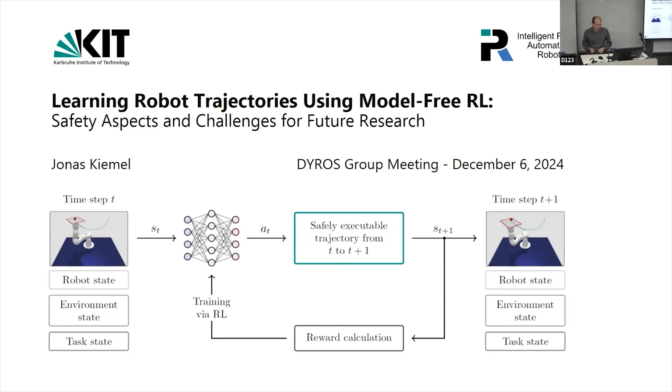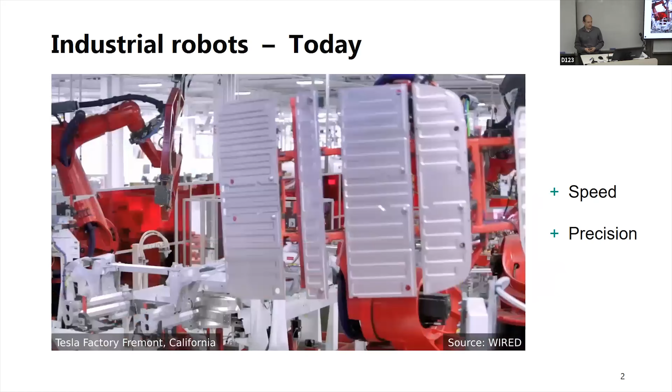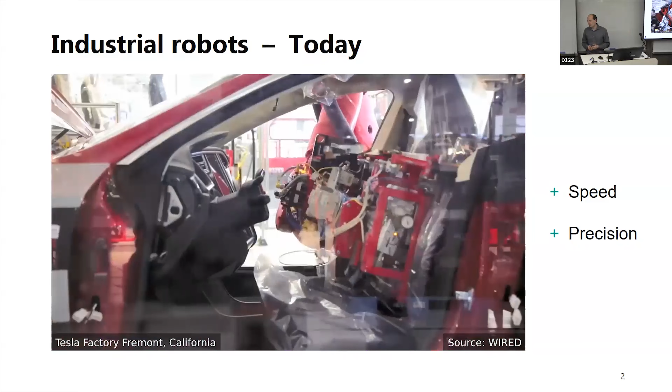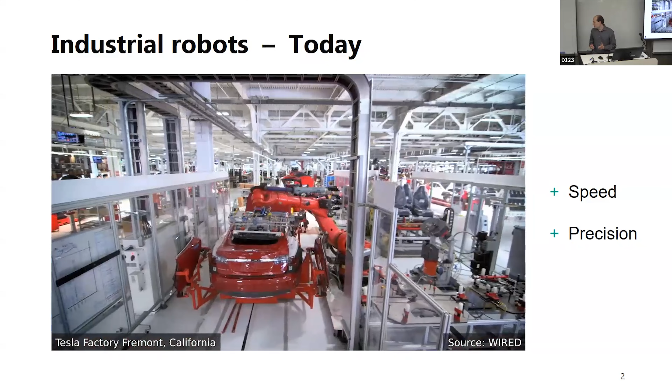So since you're all experts in robotics, I'm going to keep the introduction short. As you know, industrial robots are very fast and very precise, and that makes them perfect for industrial production plants like the one you can see here from Tesla in California. But all this only works in case the environment is completely known in advance and all the movements can be hard-coded in advance. In case the environment would change, this would no longer work.

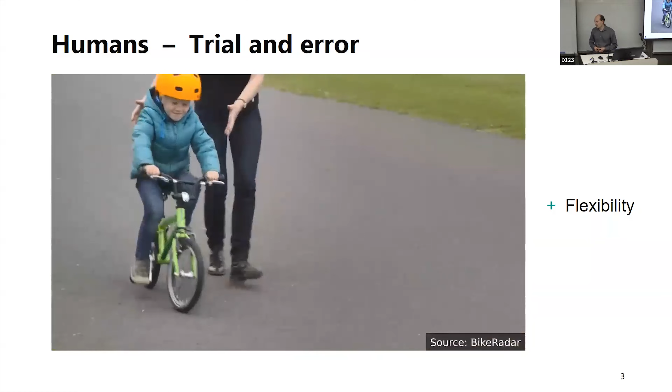And if we compare this to humans, we have a completely different approach towards learning robot movements. Humans are much more flexible. They can adapt to different tasks and different environments. And this is also because we can learn movements by trial and error.

So in reinforcement learning, we have a state space S, we have an action space A, and we have a reward function that assigns a reward to every action taken in a certain state. And our objective is to find a policy that optimizes the sum of expected rewards in the future.

So in my PhD, I worked on the topic of generating robot trajectories in real time, considering safety constraints. In my case, each state contained information about the robot, the environment, and the desired task. Then the state was given into a neural network. The neural network outputs an action, and this action is used to compute a trajectory from the current time step t to the next time step t+1. And after the execution of this time step, a reward is calculated, and this is used to train the neural network.

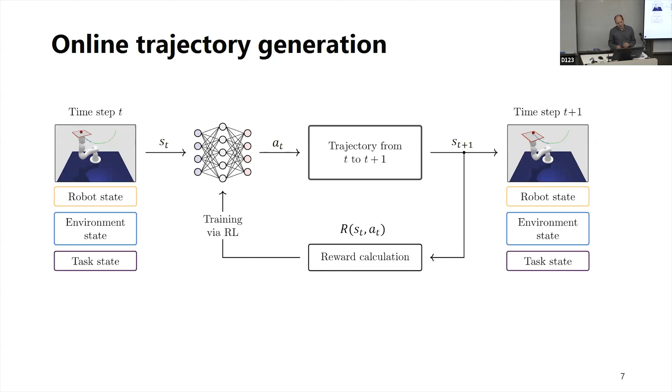How long is the time step typically? In my case, between 50 milliseconds and 100 milliseconds. So I usually use a frequency of 20 Hertz or 10 Hertz. Depends a bit on the task.

So it's a trajectory, that means you have many points in between t and t+1? It is like I compute the trajectory, yes, for 100 milliseconds, but I interpolate the points in between that are given to a joint trajectory controller. And this frequency is, of course, higher. This is usually 200 Hertz for these industrial robots I work with. These are from KUKA.

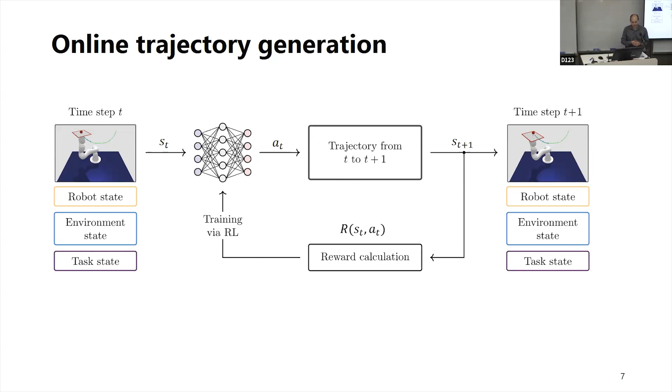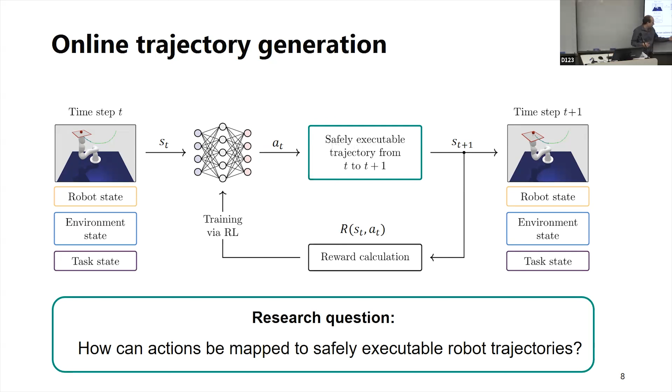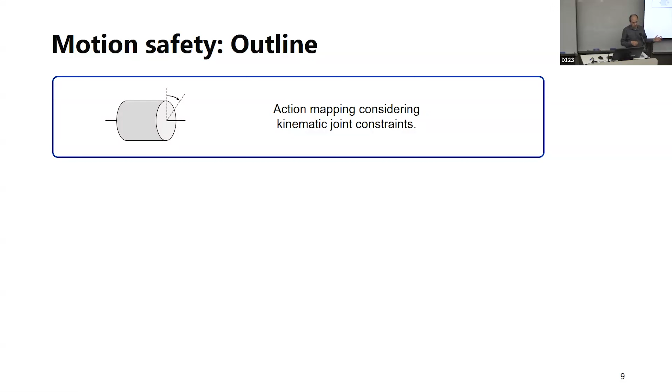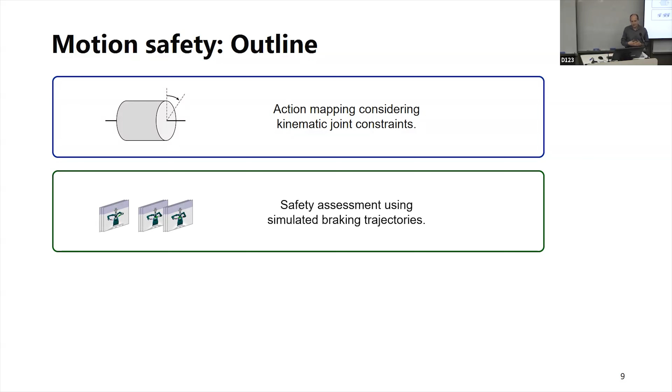And the actual research question was, how can we make sure that these actions are mapped to trajectories that are safely executable? In this talk, I'm going to talk about 3 techniques used in my PhD. The first one is an action mapping, which ensures that kinematic joint constraints are satisfied when generating trajectories. The second technique uses background simulations of braking trajectories to additionally ensure that collisions with static obstacles and self-collisions can be avoided. And in the third part, I will talk about a way to extend this technique so that moving obstacles can also be considered. This is done based on a data-based risk estimation and learned backup behaviors.

So for the sake of time, I'm only shortly talking about the state of the art, but in general, there are 3 directions to approach safety in reinforcement learning. The first one is a practical perspective, and this includes strategies to reduce the occurrence of safety violations or to reduce their impact, mostly based on engineering, like the design of the environment. For instance, if we have a bipedal robot, we could attach it to a support frame so that the robot cannot fall even if it loses balance.

And there's also the more theoretical perspective on the problem. What we can do is we can adjust the optimization objective. So this function that tries to optimize the sum of future rewards, we can, for instance, include an additional risk metric to this function to avoid safety violations during the course of training.

The problem with these approaches is typically that they are not very effective at the beginning of the training process, because the optimizer needs to collect data in the environment first before it can optimize this objective function. And the third approach, and this is also the approach I used in my PhD, is to adjust actions that are considered risky and to replace them with actions that are considered safe.

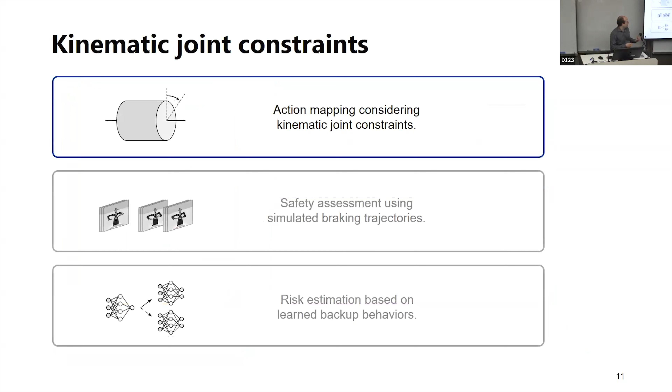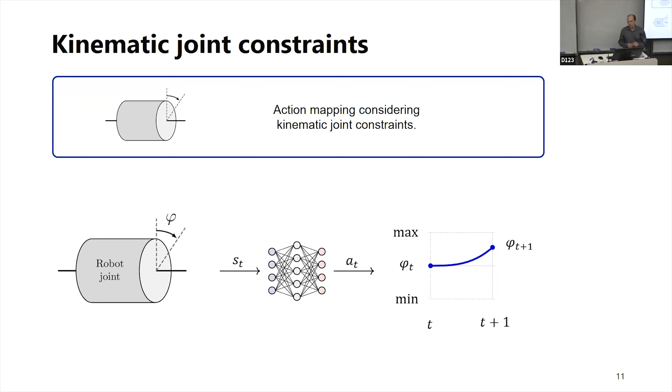Okay, now I'm going to talk about the first part, this action mapping, considering kinematic joint constraints. So what does this mean? If we have a robot joint, revolute joint or prismatic joint, we can describe the position, in this case of this revolute joint, based on an angle. And when we generate our action with a neural network, we more or less need to define the curves of this angle over time, so from t to t plus 1.

And when we do this, we need to make sure that certain constraints are respected, in particular constraints on the position. The first derivative of the position is the velocity, the second derivative, that's the acceleration, and also the third derivative, which is called jerk. And if we do this, we will end up with smooth movements that do not overload the robot joints.

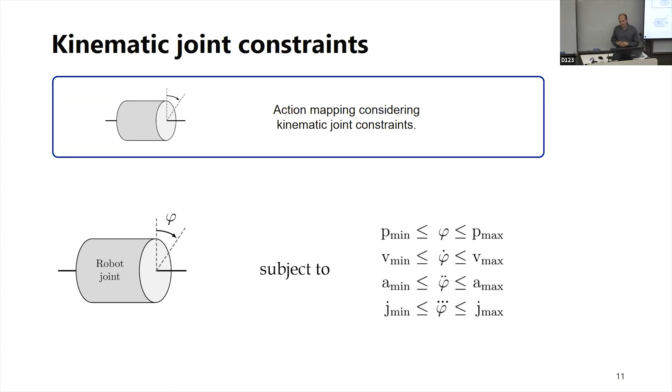So what is usually done, what's the state of the art? Often in reinforcement learning, actions are mapped to constant velocities. So for instance, if you have a normalized action of 0.6, it is mapped to a velocity of 60% of the maximum joint velocity, and so on. And if we do this, we get continuous positions by integration, which is nice.

However, the position limits can also get violated depending on the selected actions. And as we can see, the velocities are discontinuous, and that means our acceleration limits are violated, and also, of course, the jerk limits are violated as well. And now the question is, can we ensure that every action leads to a trajectory that respects these kinematic joint constraints? And the answer is this is indeed possible.

And what I did in my PhD is I computed a so-called upper trajectory and a lower trajectory, and the action was used to specify an intermediate trajectory between these two. And the upper trajectory is a time optimal trajectory to the maximum joint position. You can see this here. And that should reach the maximum joint position at a velocity and acceleration of 0.

And the lower trajectory goes to the minimum position, also at an acceleration and velocity of 0. And these time optimal trajectories can be computed analytically. And now if we have a closer look at the relevant time interval from t to t plus 1, we can just say, in case our action is -1, our resulting trajectory can follow the lower trajectory. If our action is 1, it can follow the upper trajectory.

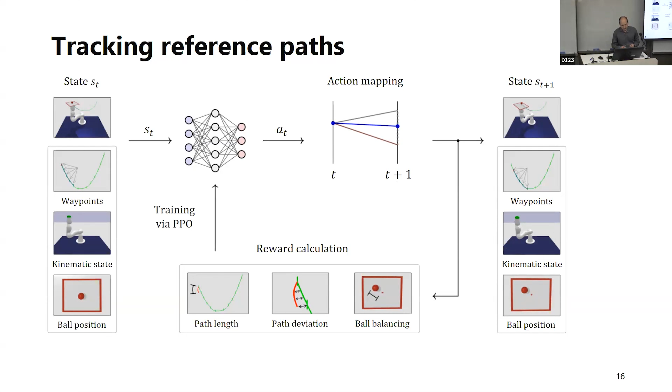The second component punished the deviation to the reference path, and also this ball balancing objective was added so that the ball stays close to the center of the plate. And I used PPO to train the neural network.

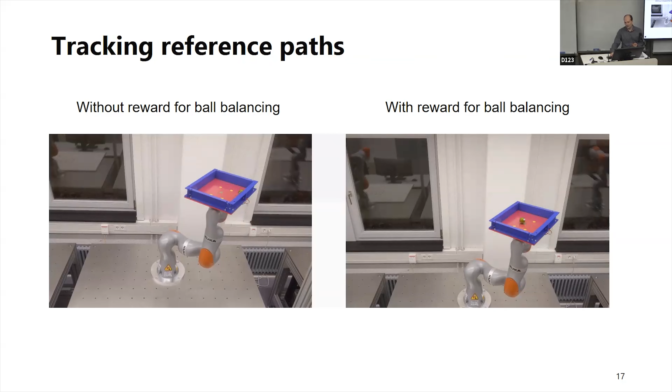And here you can see some results. So on the left side, the robot is trained without this additional ball balancing objective. In this case, of course, the ball balancing doesn't work. And on the right side, the ball balancing is also rewarded so that the robot can learn to keep the ball close to the center of the plate.

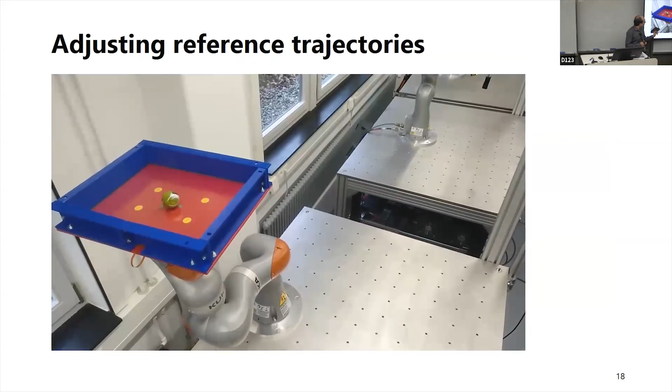And I also use this to adjust reference trajectories. So in case of a reference trajectory, it is shown here without any adaptations. The timing of the trajectory is already given, and the neural network tries to generate a trajectory with the same timing, but that can balance the ball.

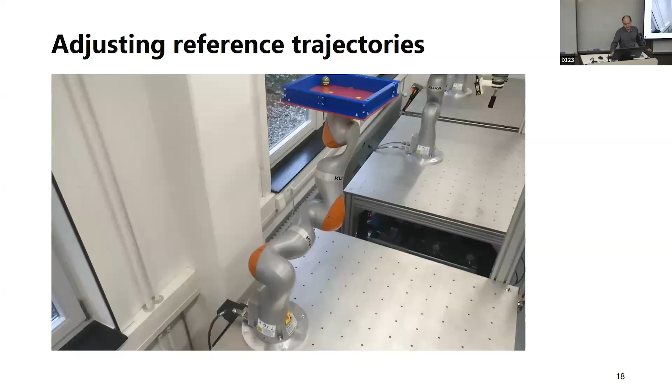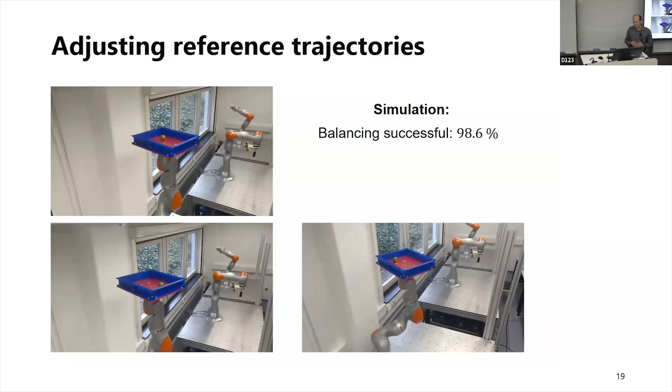And here you can see some results in simulation. So the networks are always trained in simulation, but then they can be transferred to some degree to a real robot. In simulation, this worked in 98.6% of all cases. And for the sim to real transfer, the balancing still worked in 82% of the cases.

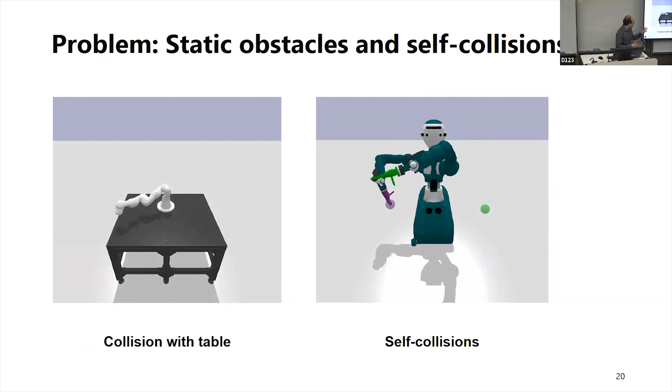So this action mapping is quite nice because the kinematic constraints are satisfied, but it's still not perfect because when we start our training process and let's say we have a robot mounted on a table, we will of course have collisions with the table due to the random movements executed at the beginning of the training process, or if we use a humanoid robot with 2 arms, the arms will also collide. So in this case, these are self-collisions.

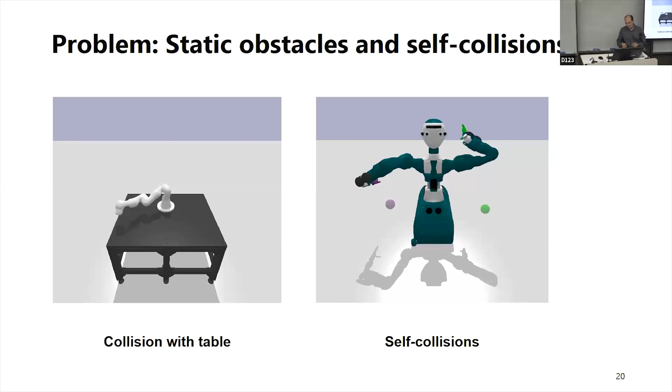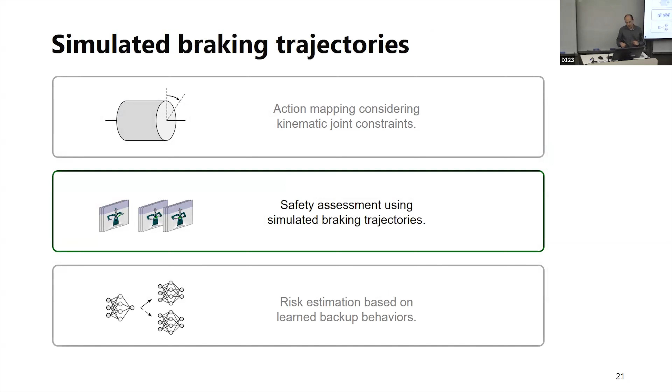So in the second part of my talk, I would like to talk about a technique to avoid also these kinds of collisions during the training process. So just a short recap, we are at time step T. We know our action A_T generated by the neural network. We can map it to a trajectory from T to T+1. But what we do not know is the future trajectory starting from T+1 because it depends on unknown future states.

And what we now additionally want to do is we want to avoid collisions. So now the idea is maybe we can perform a safety check by simulating the next time step and the future trajectory in a physics simulator. However, as we do not know the future trajectory, this doesn't work directly. But it turns out it is sufficient to know one way to continue the trajectory that is safe, a so-called backup trajectory.

And in case that we have a robot with a stable base, so typically industrial robots have a stable base, this humanoid robot also has a stable base. Of course, robots with legs do not have a stable base. In this case, this wouldn't work. But in these cases, we can use a braking trajectory as a backup trajectory. And a braking trajectory is, as the name says, a trajectory that leads the velocity and acceleration of all robot joints to 0.

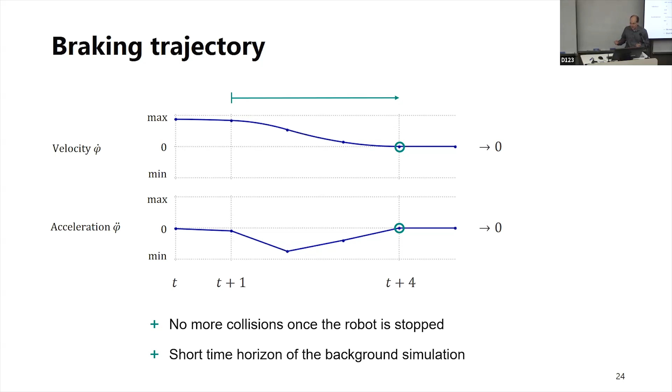So I want to give you a short example how this works. So let's say we are in time step t and we select an action, and this action specifies a movement from t to t plus 1, and then we add our backup trajectory and we perform a background simulation in the simulator, and check if collisions occur during the simulation. So let's say no collisions occurred during this background simulation, then we know we can execute our action A_T.

And this is shown at time step t plus 1. So by executing this action A_T, we end up in time step t plus 1. And now we repeat this procedure and we get another action A_T+1. But also before we execute this action, we once again perform our background simulation. And now it turns out we detect a collision during this background simulation between the hands.

And what we can do now is, instead of executing this action that we got from our neural network, we can instead execute an action that is slowing down the robot joints. And this action will lead to exactly this situation that we simulated at the time step before. And due to this, we know that following a braking trajectory from this state, there will be no collision. So it's safe to execute this action at this point.

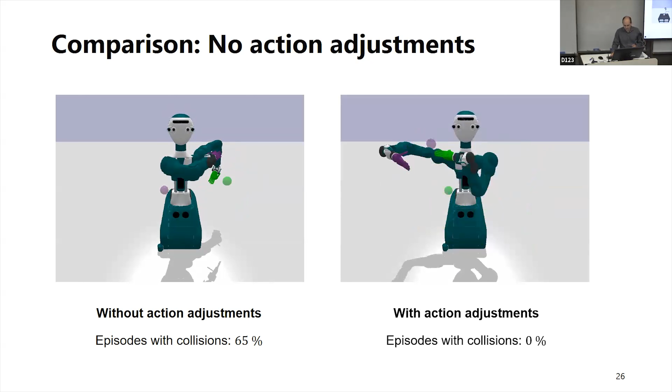But even with this technique, there are still some limitations, and one limitation is moving obstacles, because the assumption was that once the robot is stopped, no more collisions can occur, and this is not true if we have moving obstacles in our environment. And I tested this with different environments with moving obstacles.

And in order to extend the technique also to environments with moving obstacles, we can now say, okay, instead of using a simple braking trajectory, we can use an optimized trajectory that tries to avoid safety violations. So this braking trajectory is replaced by a backup trajectory that avoids collisions, and this is done based on an additional second neural network, also trained with reinforcement learning, that tries to avoid collisions with moving obstacles and also self-collisions and collisions with static obstacles.

But if we do this, two additional problems will arise. The first one is the time horizon that needs to be considered when executing this trajectory in a physics simulator in the background, because now that we have moving obstacles, we need a longer time horizon that needs to be taken into account. And that means the computational effort for these background simulations will be relatively high, and it is hard to execute this in real time.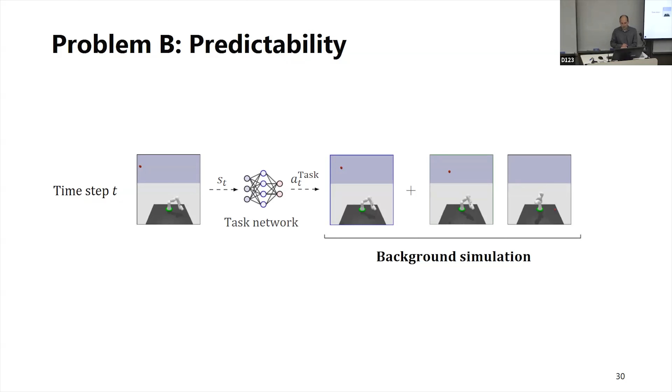And the second problem that occurs is that we also need to know the future movement of the moving obstacles. And this is also not easy, since we in general cannot completely forecast the movement of moving obstacles.

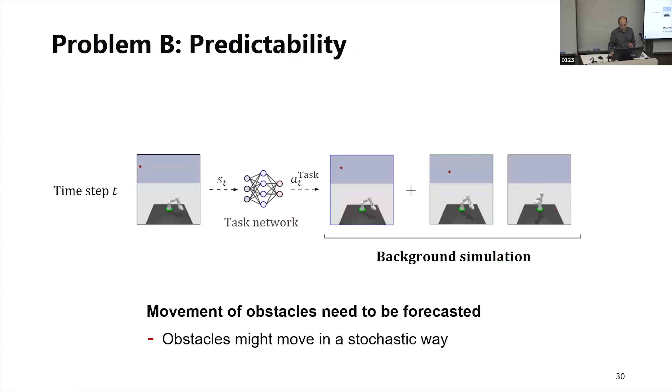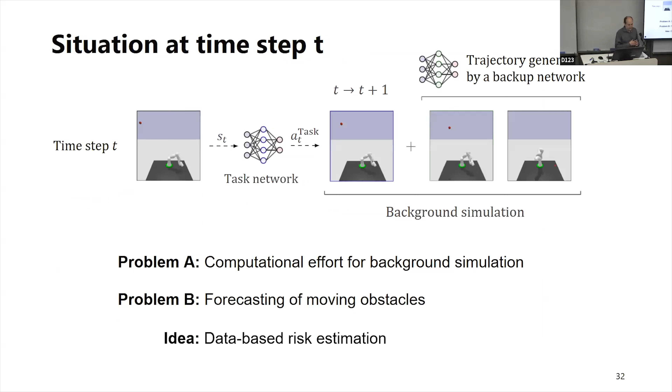And to address these problems, the third technique that I want to talk about introduces a data-based risk estimation. That means we initialize the robot in a lot of random states. We select a lot of random actions, and then we can, in a physics simulator, execute this trajectory from the next time step plus the backup trajectory. And we can check what is the outcome, is there a collision or is there no collision, and collect data points by assigning a risk signal to each data point.

So if there's no collision, we say our risk is 0. If there is a collision, we say our risk is 1. And then we can specify data points with the state, action, and this risk signal. And all this data can then be used to train an additional neural network, a so-called risk network, to estimate the probability of a safety violation when executing our action a_t in our current state.

And then we can say, okay, if our probability or our expected probability is higher than the so-called risk threshold, we won't execute the action from the neural network, but the action from the backup network.

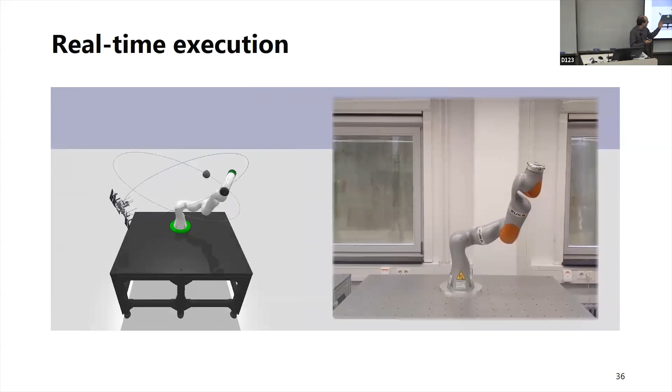Here you can see some results that I achieved with this approach. So the base of the robot indicates what is done. Green means the task policy is executed. Red means the backup policy is executed. And based on this risk threshold, we can then adjust how risk averse our policy will behave, even in environments with moving obstacles. And this approach can be used from the beginning of the training process. And since this risk estimation with the risk network is really fast, we can also execute this in real time.

So this was more or less what I did during my PhD. Just to sum up, the first part was this action mapping so that kinematic joint constraints are considered. Then I added a technique based on background simulations to ensure that collisions are also avoided with static obstacles and self-collisions. And this technique was extended using a data-based risk estimation and a learned backup policy so that moving obstacles can also be considered.

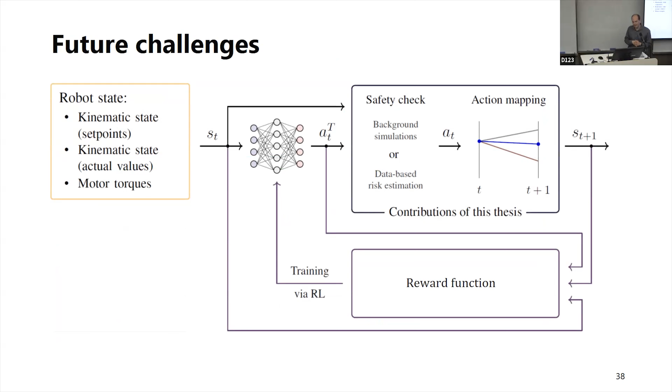Now I just want to talk in the last part of my talk about some challenges that I identified, some ways to improve the techniques, and also a bit about what I'm trying to work on in the future. One challenge, of course, that I didn't address is the inclusion of visual feedback. When I trained the neural networks, I usually used low-dimensional input spaces, so low-dimensional states, more or less kinematic state information.

And of course, visual feedback would be great also when it comes to considering different tasks, so multitask learning. In this case, we could add, for instance, an embedding considering demonstrations or textual description to our state so that we could learn a policy that is able to perform not only one task, but different tasks. However, a big challenge when we want to do this is the definition of a suitable reward function.

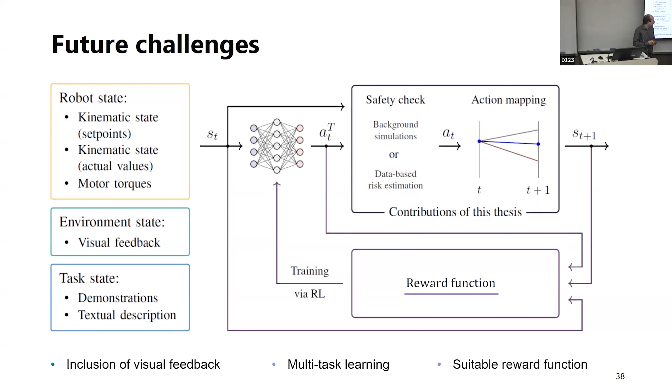What I found in my work is that it is really not so easy to find a good reward function for a task, and that is why a lot of researchers use tasks where it is easy to define a reward function, but if you want to apply it to a real-world application, things are pretty difficult because you need to find a working reward function first.

For instance, when it comes to multitask learning, there is a benchmark called RLBench. It's a benchmark with 100 robot tasks, which is really nice to evaluate your techniques on different robot tasks. But also in this case, the problem is only 3 of these environments provide a shaped reward function. That is why most people use this benchmark with demonstrations and use imitation learning or behavior cloning to get a policy that is able to work in different environments.

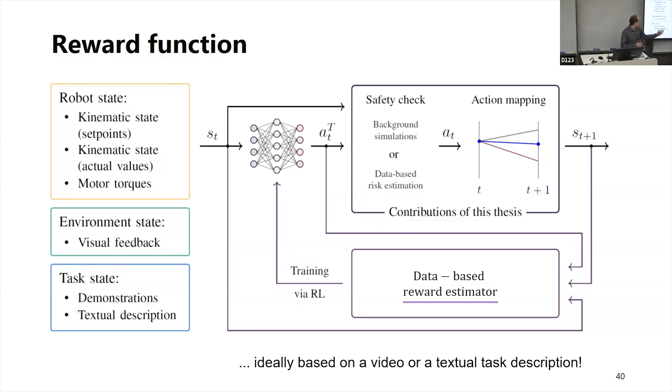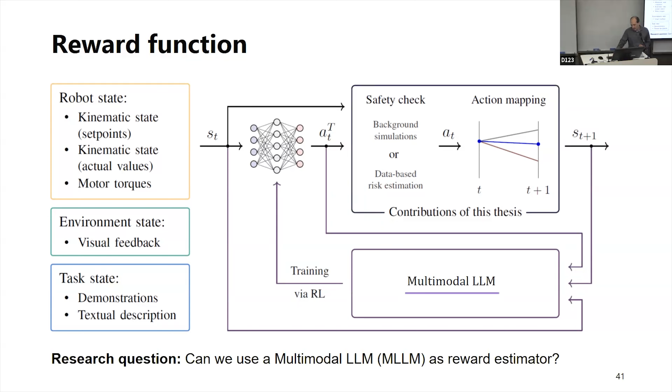Now one idea could be to say, okay, instead of defining explicit reward functions, maybe we can use some kind of a data-based estimator for rewards, ideally based on videos or a textual task description. So the research question in this case is, can we, for instance, use a multimodal large language model as a reward estimator? That is what I'm currently looking into.

In fact, we have 3 different options to use the knowledge of a multimodal LLM for reward estimation. Option A would be to just rely on the data and the knowledge the network already has. Option B would be in-context few-shot learning. That means we give some examples to the LLM and hope that it is able to estimate rewards based on a small number of examples. The last one would be fine-tuning in case we have access to the network parameters. How to do this exactly is still a question of ongoing research.

One way could be to give the network a small video, a task demonstration, and also an input text of what the robot should do, and then give an image of the current time step and the next time step, and a potential reward signal, and hope that by giving a few examples, the network can understand what the desired objective of the task is.

Another potential way would be to also give an input video and an input text, but in this case, ask the network just which of a couple of potential different outputs is better, so that we could do some kind of ranking. This could be used for so-called direct preference optimization to optimize the neural network parameters. That's ongoing research, and that's what I'm currently looking into. I'm also not 100% sure which option will be the best for this.

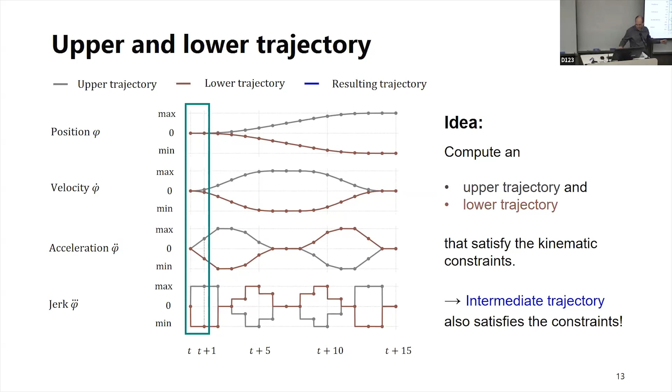But this is indeed the case, because if we would assume that the same distance between the upper and lower trajectory is also kept for all following time steps, not only for the next time step, then we would also generate a feasible trajectory. And that means if we take only one step, we can be sure that at least one feasible trajectory exists. This could be used as a fallback, but usually doesn't need to be, because since one trajectory exists, we will always find a new upper and lower trajectory at the next time step.

And that is what is shown on this image. So here you can see at each time step the upper and lower trajectory is recomputed. And at some time steps, we have the situation that these fall together. So in this case, no matter which action would be selected, the robot will always execute the same movement, because otherwise we would violate our velocity limits.

You are always choosing in between this maximum and low? Yes. Your action will be within this limit. So the trajectory will always stay in between. It could exactly follow the lower or upper trajectory in the corner cases, -1 and 1.

Could you explain about... Yeah. Okay. Yeah, sure. Of course.

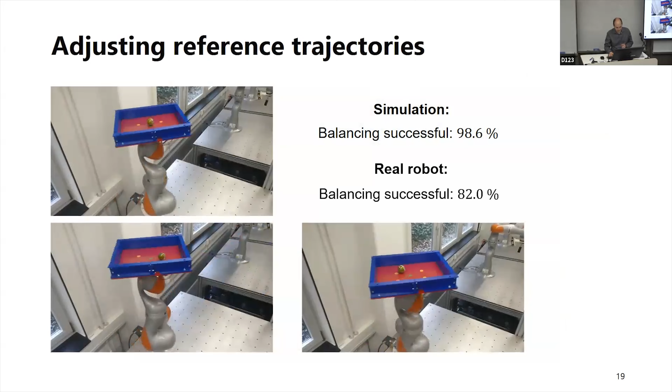So the idea with the braking trajectories is that, let's say we execute our action. In order to make sure that we are still in a safe state after executing our action, we need to know that there's at least one trajectory that we can follow that is collision-free. What is done here is we check before we execute our action if the robot can be stopped safely after executing this action. If this is the case, we can execute this action, because if we do not find a safe action in the following state, we can always safely slow down the robot and end up in a state that is considered safe.

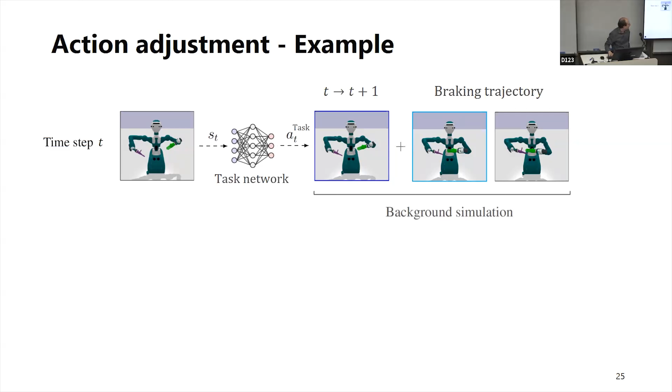And in case now in our next time step this doesn't work, so for the next action we do not find a safe braking trajectory, that means this state is considered as unsafe. But from this state here, we can always go to this one by executing an action that brakes the robot, that slows down the robot, and this state we know it is safe. So let's say in case we wouldn't find a safe action from this state, we could always go to this state from which we know that it is safe.

And from now on, from this state, since the robot is at a standstill, the state will always stay safe. So that is the basic idea. And that works in case we do not have moving obstacles and the robot can be stopped at each potential position. This of course doesn't work if you have a robot with a floating base or with legs. Then the robot might simply fall if you stop it at a position that is not stable. But in case the position is stable, this always works and makes sure that you do not collide.

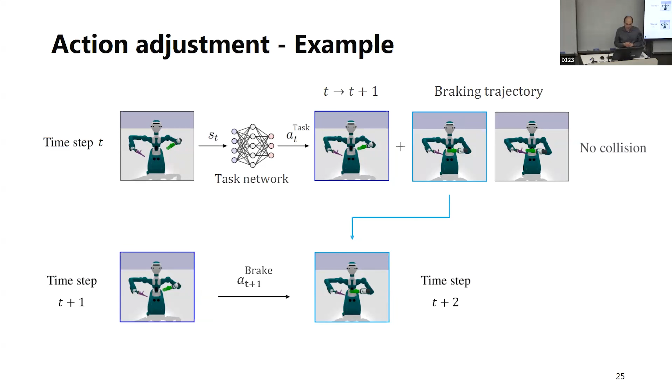I have a question. So this process is during training? Yeah, during training, but usually also during evaluation. So it's more or less always used. You could also use it just for inference. So say you train it without this, and then you use it only if you execute movements with the real robot. But typically your task performance will go down when you execute it only during inference and not during training.

For instance, here the robot is trained without this technique. On the right side, it is trained with this technique, and around 10% of all actions are adjusted. And due to this action adjustment, the task performance will also go down a bit. In this case, it was around 2.3 target points per second that the robot reached, and on the right side it was 2.1 target points per second. So there's a slight decrease in performance when you adjust actions, because if you adjust 10% of the actions, these actions won't contribute to the actual objective of the task.

So you also need to make sure that this adjustment rate isn't too high. Let's say you need to adjust 50% of your actions, your task performance will probably not be too good. But if it's like 10%, it's okay. So the impact will be moderate.

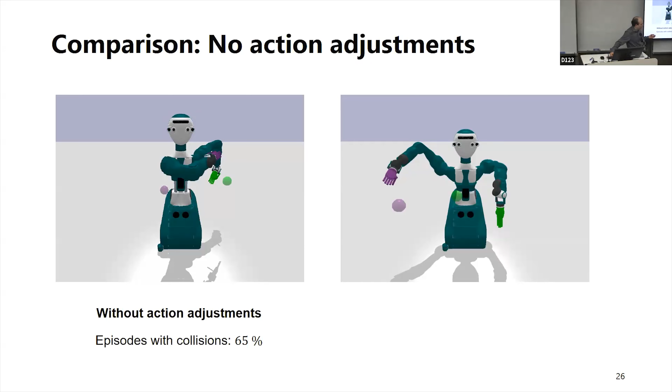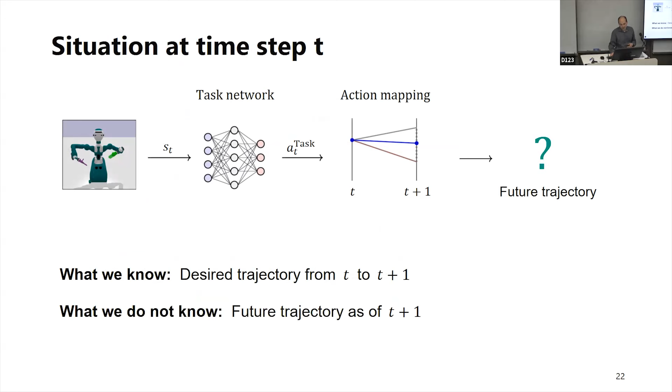Yes. Have you considered solving this problem through constraint formulation? Constrained reinforcement learning. So there are different approaches to address these kinds of problems. As I said, in the state of the art, it is also possible to use constrained learning techniques. There are some special algorithms which can handle safety constraints during learning. Let me go back.

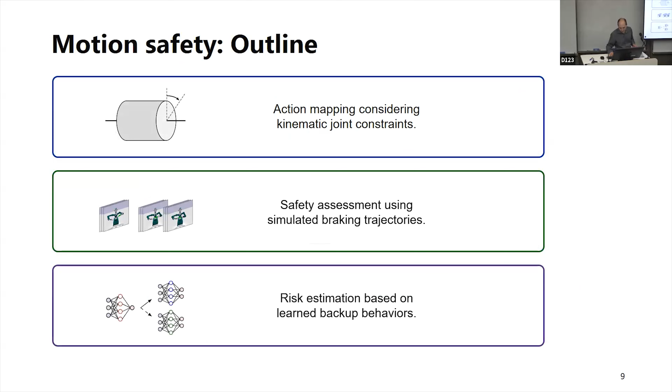So what you probably refer to are techniques that use methods from constrained optimization to optimize this objective function subject to additional constraints. This is possible to some degree, of course. The drawback from my perspective is that these techniques do not really work well at the beginning of the training process. And also in the literature there are different kinds of constraints. Some are called instantaneous constraints that need to be satisfied at each time step. This is the kind of constraints I looked into, and there are also so-called cumulative constraints, which refer to a sum of a penalty that needs to be restricted.

For instance, if you have a car with a limited amount of fuel, you have a safety constraint that the fuel doesn't run out. And in particular for these kinds of constraints, there are some algorithms from constrained optimization that work very well. There are different approaches to address these problems, and every way has benefits and also some drawbacks. In the literature there are really a lot of different safety constraints, so it's really hard to say we have one algorithm or one technique that can handle all kinds of problems.